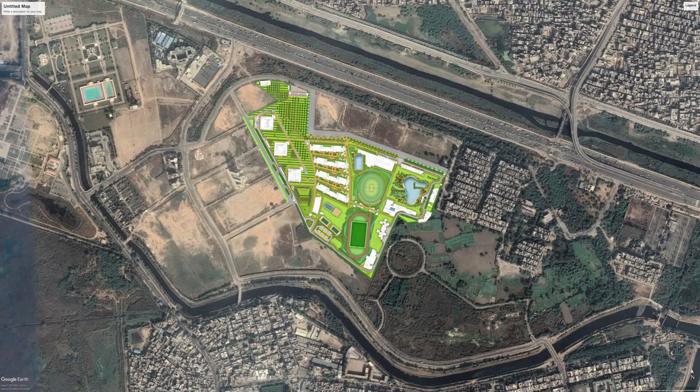Dr. B.R. Ambedkar University is envisioned as a singular campus with various schools and centers that are part of the same campus, sharing common facilities. There are 7 schools and 9 centers which share central facilities of library, administration, auditorium, lecture halls, and teaching areas. Each school and center is further administered by individual administration offices and has independent specific needs like workshops, labs, and theaters as per the course program.

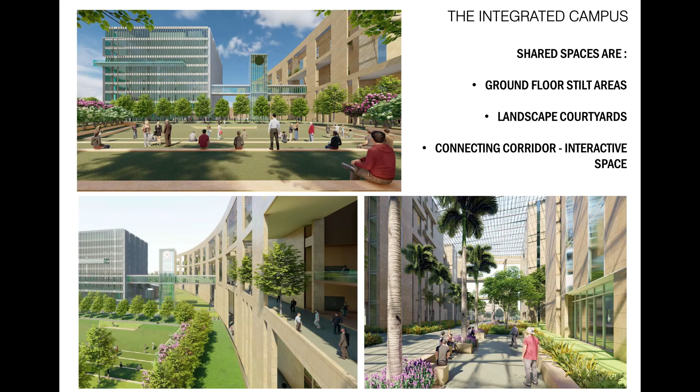University Design Philosophy: the whole essence of the university ideology is to have common central spaces and shared spaces which provide a congenial and comfortable learning environment. With this philosophy in mind, we approached the design for an integrated campus design.

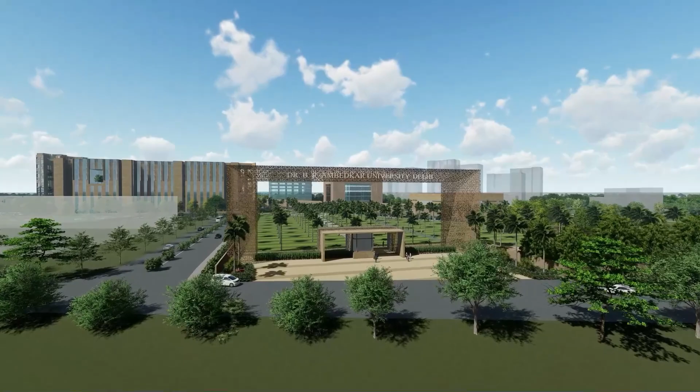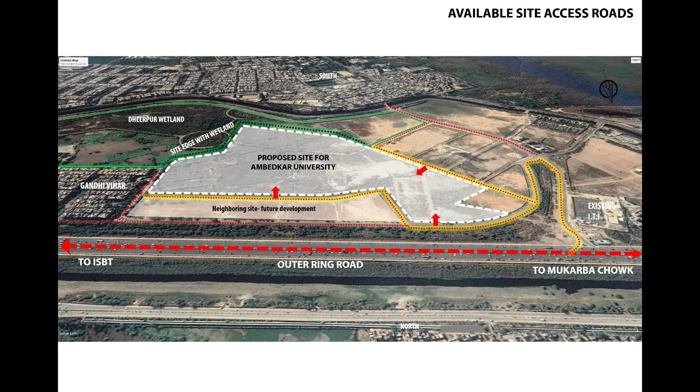The 49-acre greenfield site is mainly accessed directly from the outer ring road and is carved out of a wetland area. It is adjacent to the most unique Dheerpur Wetland Park. To the east, the land is flanked by the existing low-rise Gandhi Vihar colony. Other than that, neighboring areas are open land, with a vacant strip of land to the north of the site planned for future commercial land use, and residential land to the south.

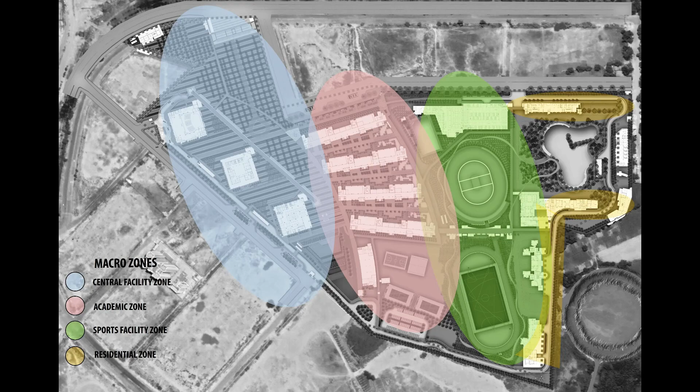As per the brief of the project, we identified 4 major zones of development, out of which the heart of the campus is the central facility zone. This contains the main teaching areas, administration, library, and auditorium block, for which the center of the site provides the large land parcel needed to support this facility.

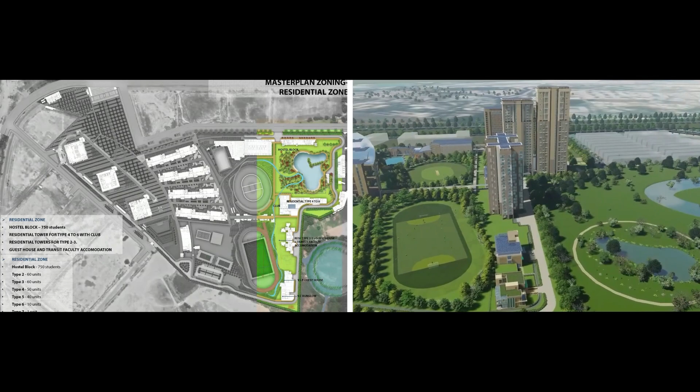The residential zone comes at the periphery, enjoying the views of the wetland park. The sports zone acts as a buffer between the residential and academic zones. The location of the site along the outer ring road, with the signature and rainbow bridges, presents an excellent opportunity to announce the university with an iconic entrance.

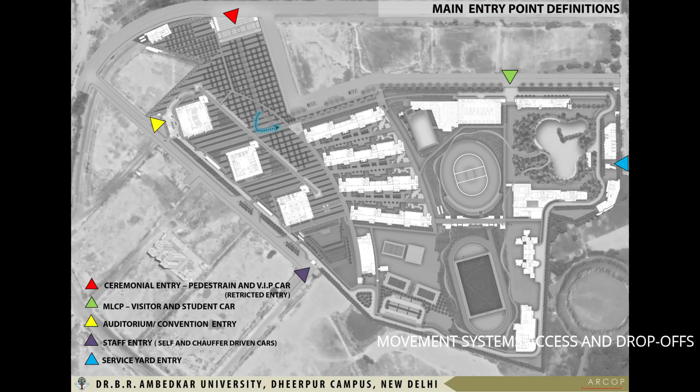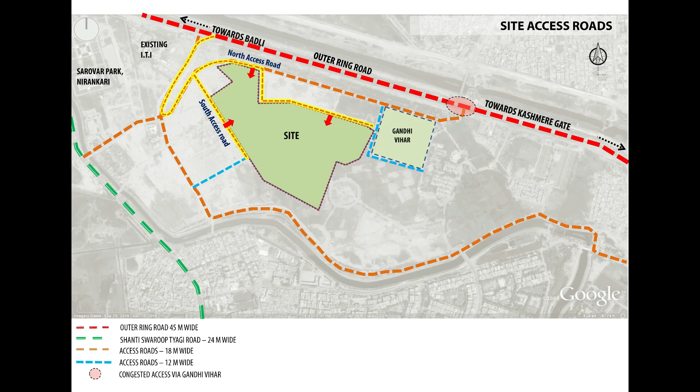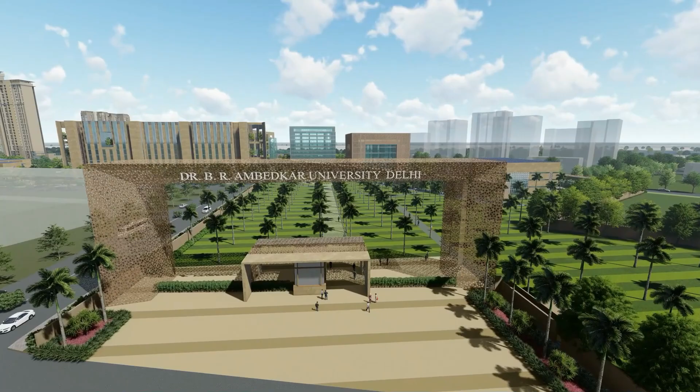Gates and drop-offs: the site has available access roads on 3 of its edges, all 18 meters wide, and entrance gates have been proposed accordingly. The main ceremonial gateway has been proposed along the outer ring road. This grand gateway provides an excellent visual window to the site and announces the university on the highway. This entry is primarily pedestrian, with only occasional VIP car movement on the motorable path provided, going up to the VIP drop-off. 2 entry gates are proposed at the southwestern edge road behind the central facilities.

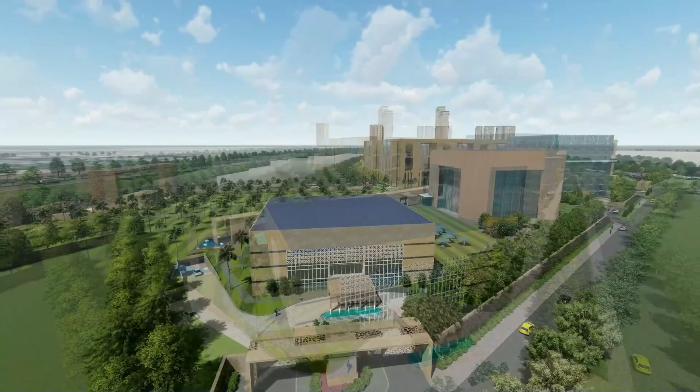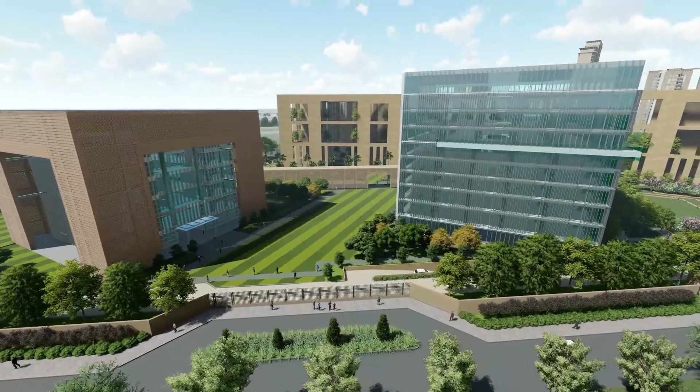There is a dedicated auditorium entry that may be used by staff cars as well, with ramps to the basement parking provided here. A public transport drop-off zone for e-rickshaws and cabs has also been created along this edge for students and staff. In continuation, another entry for staff cars has been located here. Chauffeur-driven staff cars may use the drop-off near the theatre block and park at the surface parking nearby.

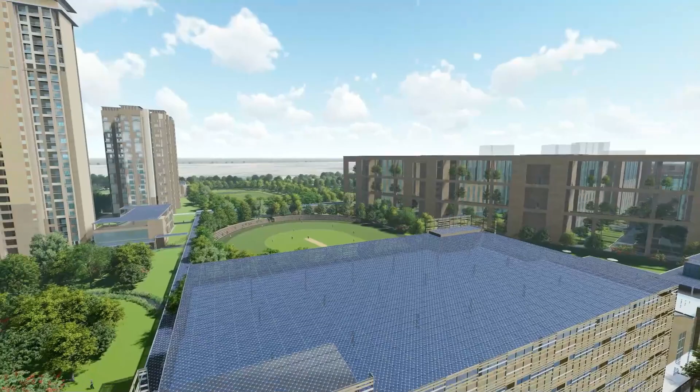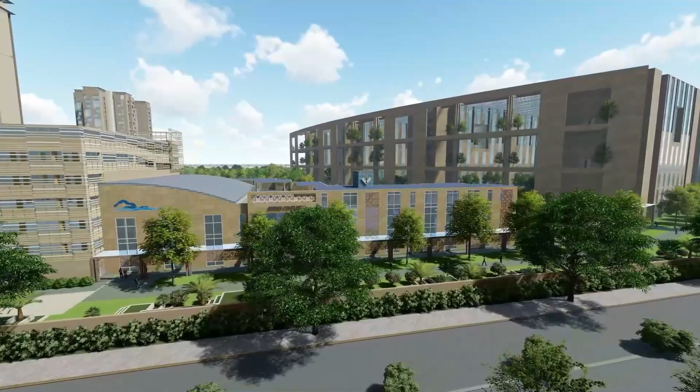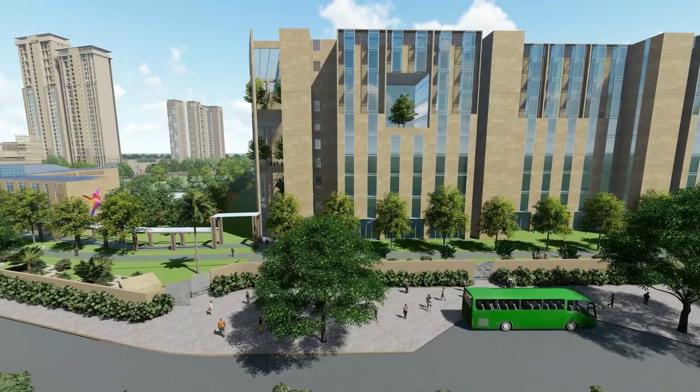Visitors, students, and residential car entry is allowed at the northern edge road near the multi-level car park, which will be the major car park zone for them. Residents may use the residential basements for parking as well. A bus drop-off exclusively for students has been created on the northern edge of the site, specially useful on occasions of sporting events or cultural fests.

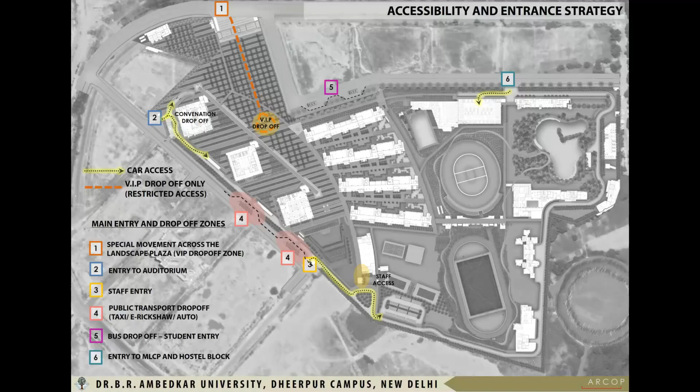Car movement has been restricted to the periphery of the campus. The rest of the campus has been designed with comfortable pedestrian linkages, providing seamless connectivity between all zones.

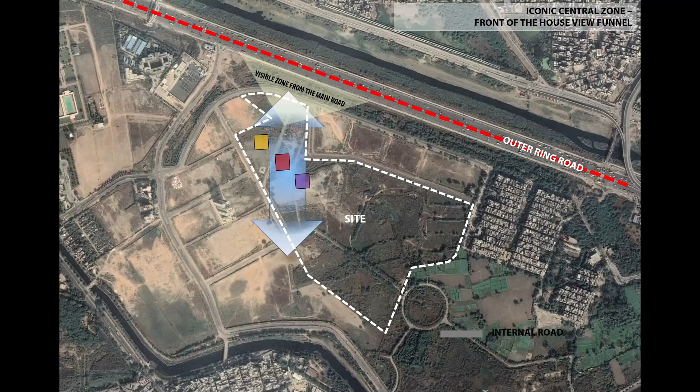The Central Facilities Zone, comprising the auditorium, the administration block, and the library block, is the face of the project, as mentioned earlier, and has been designed to be visible from the grand entry along the highway. The 3 blocks are designed in the form of 3 cuboids of varying heights, with the auditorium being the lowest and the library being the highest along the visual axis. The heights of the cuboids are the result of the design program itself.

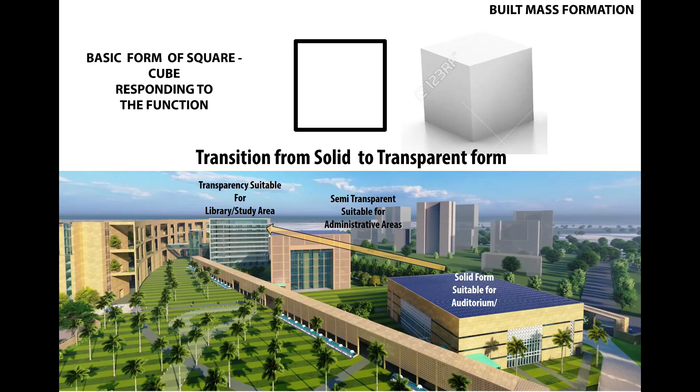The three cuboidal buildings also transition from a very solid vocabulary of the auditorium, to a semi-transparent one of the admin block, to the fully glazed transparent glass cube of the library. A glazed clock tower with sky bridge also adds to the visual and spatial experience.

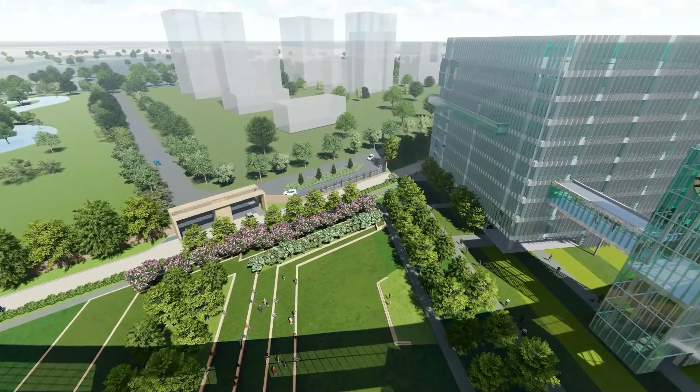The amphitheatre behind the library is a hub of informal student activity as well as prepared performances. With the student center and cafeteria at the lower floors of the library, this space promises to be the central nucleus of student activities.

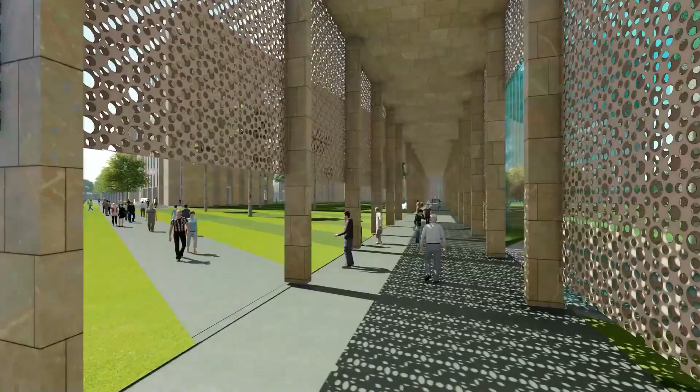The three blocks are connected by a double-height, screen-shaded colonnade that, along with the fountains, forms an impressive edge to the grand arrival garden. The three blocks have dedicated landscaped lawns in between them to cater for any functions and banqueting events.

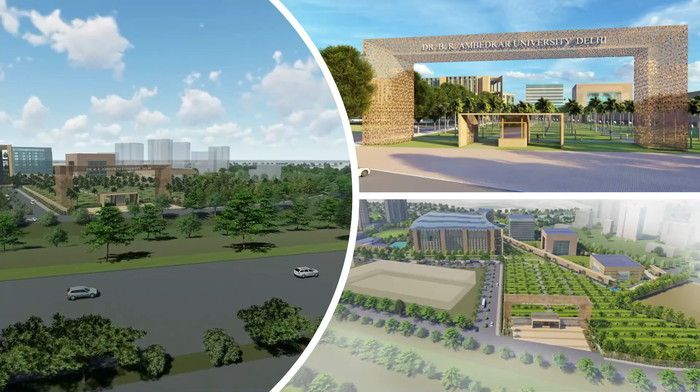The Grand Arrival Garden. The grand entry through the signature gateway leads to the Grand Arrival Garden. This 4.3-acre formal ceremonial arrival garden provides an apt foreground to the university entry.

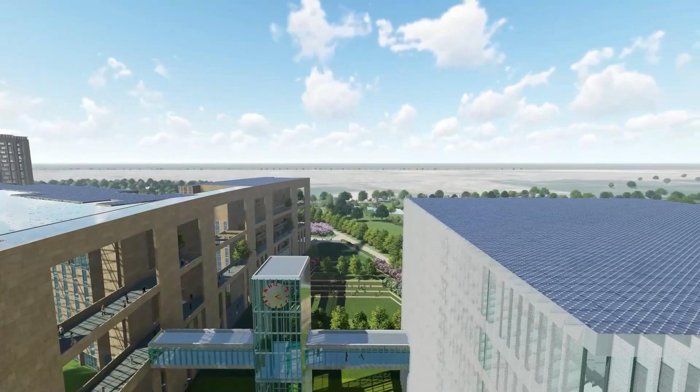It is flanked by the grand curved academic block on one side and a double-height shaded colonnade connecting the cube buildings on the other. The large landscape flows seamlessly to the library, crosses under the sky bridge, and culminates at the south at a large amphitheatre.

The academic block, a cluster of 5 towers tied together by a curved colonnade, forms the edge of the Grand Arrival Garden. These north-south oriented teaching blocks are connected via long continuous colonnades at 3 levels that offer interactive spaces for students and faculty alike.

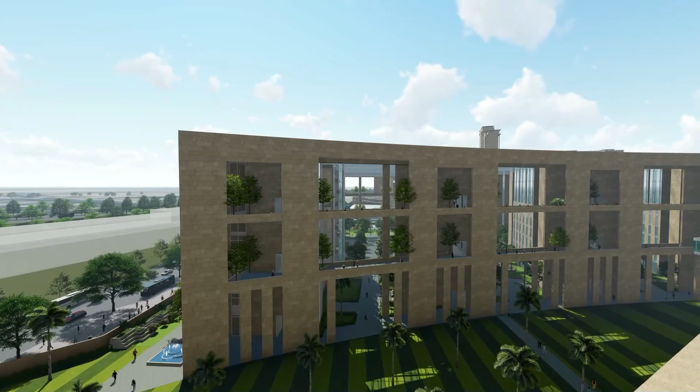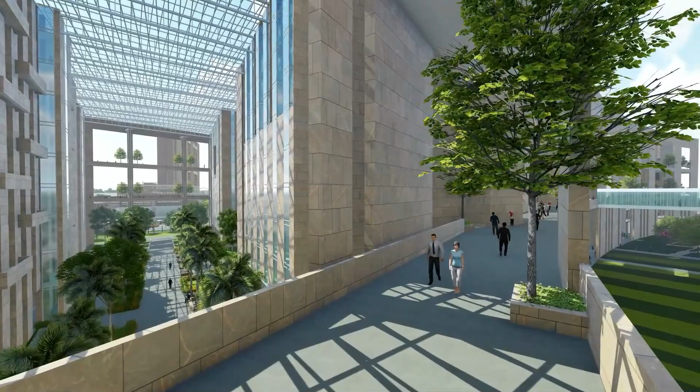The colonnades overlook beautifully landscaped internal courtyards between the towers, offering intermingling spaces for students and supporting cooler temperatures as well. The north face of these linear blocks that overlook the courtyards have large glazings to let in glare-free north light.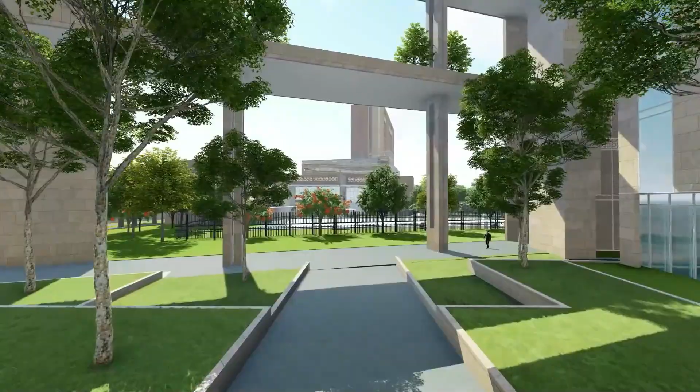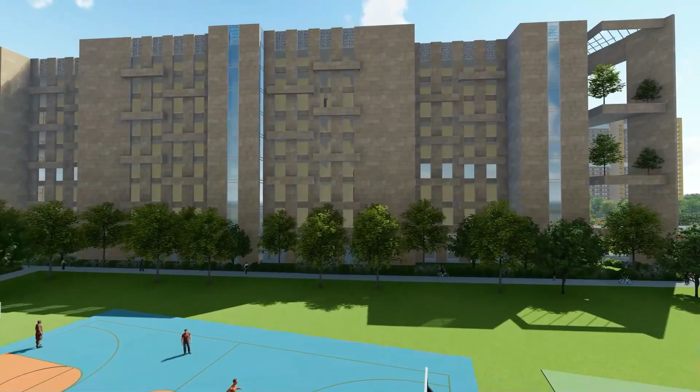The internal courtyards seep out into the vast open green area, the sports field at the other end. The rear colonnades with vertical greens tie the academic towers at the other end and form an edge to the sports field. The south side of the towers has single-loaded corridors that offer passive cooling to the main lecture halls and classrooms.

The theatre block, the fifth tower in the academic cluster at the southern edge, offers spaces for seminars, training, and theatre learning.

A glass bridge connects the academic block to the library, and separate student glass elevators have been provided for the same in the clock tower.

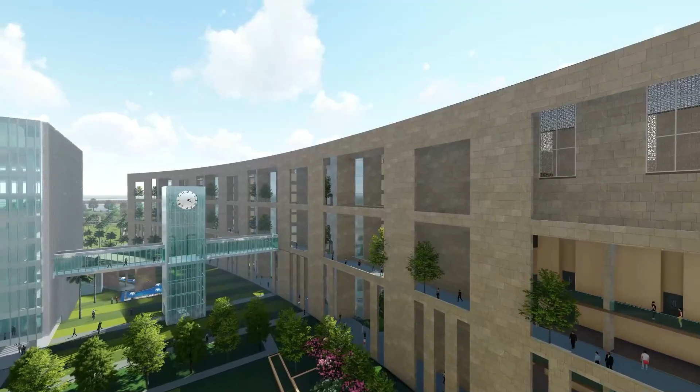Sports and Recreation Zone. The academic zone is separated from the residential and hostel zone by a large green buffer, the sports zone. The sports green provides for a seamless green space connecting with the wetland, supporting flora and fauna, and also becomes the hub of student play and relaxation areas.

The sports zone has various outdoor sports courts, a large athletic field, along with a cricket field, and a dedicated sports and health center complex. The sports center, apart from having indoor play courts, has a swimming pool complex with an Olympic-sized pool.

Student hub and connecting corridors. Movement across the site is well connected for both the pedestrian and the cyclist with shaded pavements and covered connections. These connections provide seamless pedestrian and cycle connectivity from the academic to the hostel and residential zone.

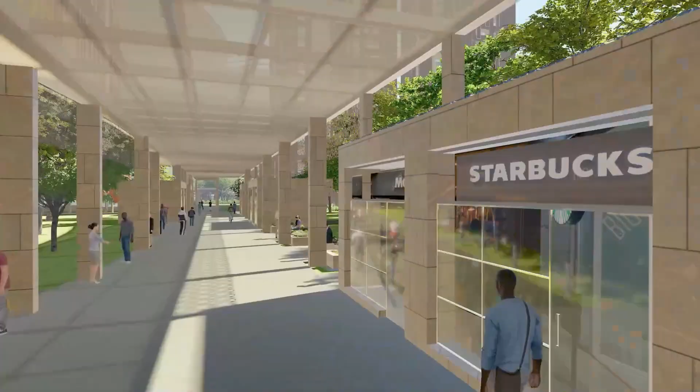These connections are flanked by hangout spaces that will have cafes and shops to support the residential and academic zone alike, and are overlooking the playing fields.

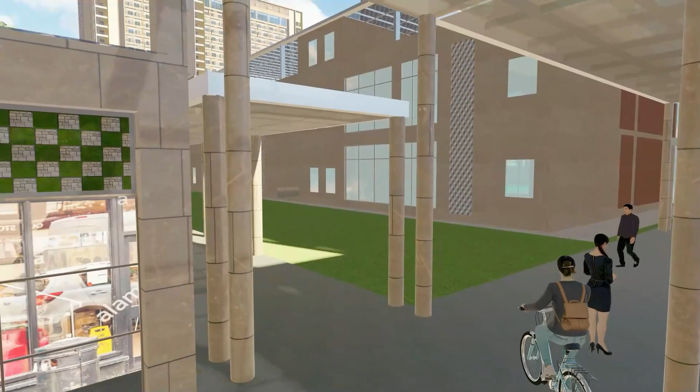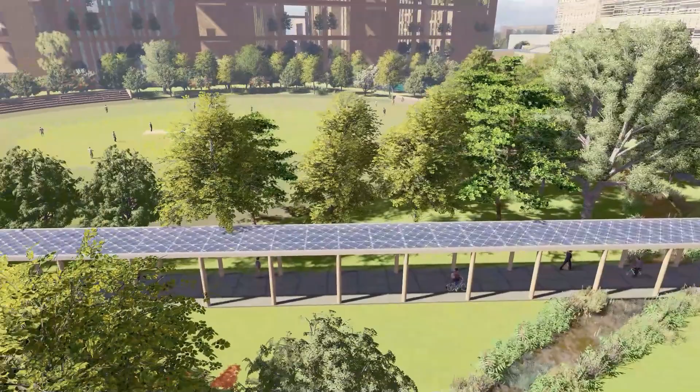These structures will not only provide comfortable shaded walkways but also provide clean energy with solar panels. These covered connections provide an apt edge to the sports and residential zone.

Student areas have adequate cycle racks and are connected seamlessly with the other zones of the site, with continuous pavement of adequate width to support both pedestrian and cycle movement.

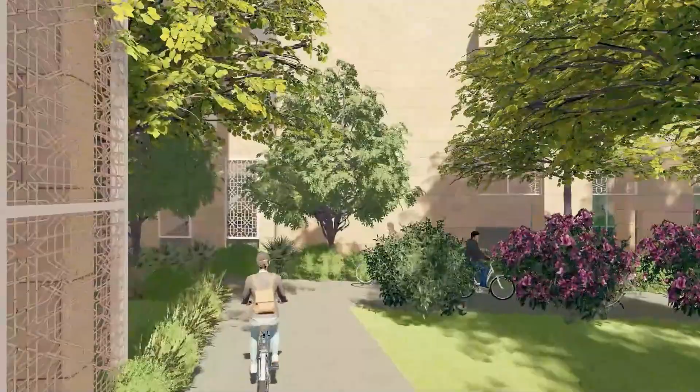Segregated from the minimal car movement, the connections are well shaded with landscape and provide a comfortable environment for the pedestrian and cycle user. The seamless pavement from the student active areas connects the academic block with sports and recreation zone all the way to the hostel blocks.

The academic block rear colonnade along the sports green connects to the shopping area and continues ahead to the hostel block, providing a covered connection.

These walking and cycling tracks provide interest and varied experiences to the user and beat the boredom of everyday use. Running alongside the cricket ground, the link joins the semi-covered corridor connection to the hostel and the northeast student entry gate for the day scholar access.

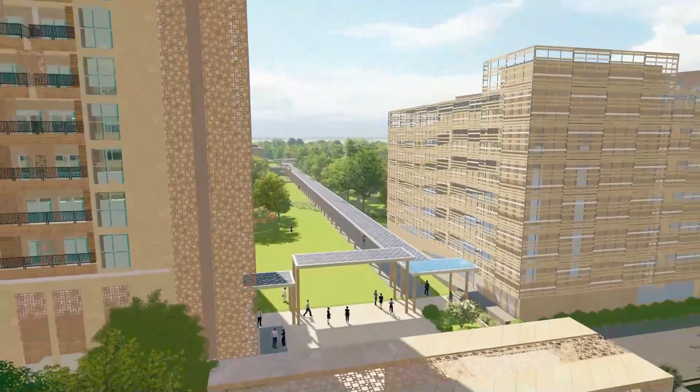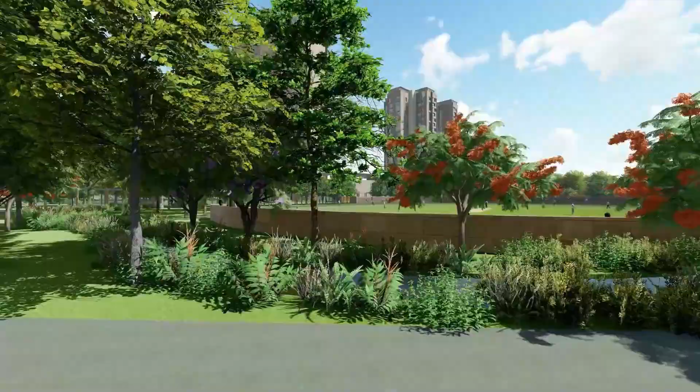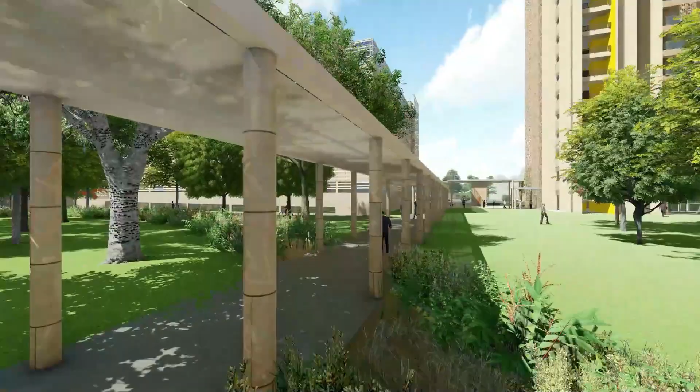The campus has incorporated sustainability and green building strategy as an integral part of the master plan and building design. Water runoffs from the open areas are carried through bioswales and emptied into a 1.25-acre man-made lake proposed on the northeastern part of the site as part of the rainwater harvesting strategy.

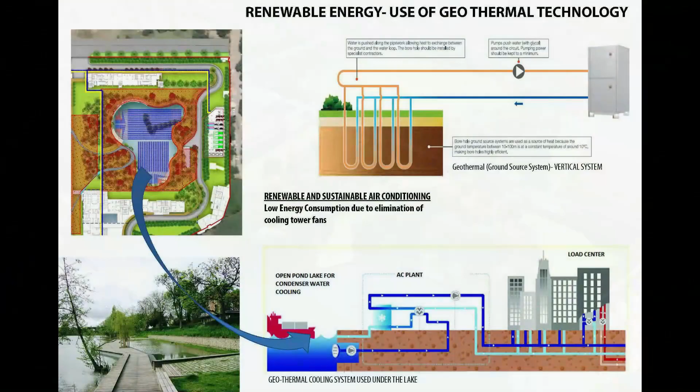The lake and open fields are also being used for geothermal cooling that will reduce air conditioning loads for the campus substantially. All building roofs have been covered by solar panels.

Apart from being a renewable source of energy, the solar roof acts as a camouflage for the unsightly terrace services, uneven lift rooms, and staircase mumties. The solar roof of the whole campus takes care of about 2.5 megawatts of on-site electricity production.

DGU glass has been used in all buildings to reduce heat intake. Operable metal louvers to shade the glass on the western face has been used in the library.

Jali screens have been used in various places as a shading device. An example is the shaded veranda covered in Jali in the administration block. Also, the connecting colonnade to the central facilities has Jali screens.